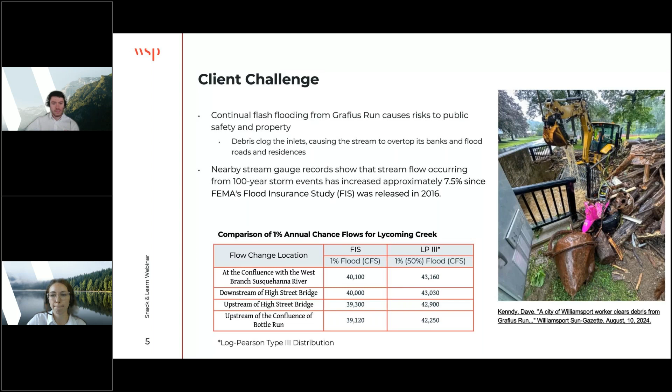So now we're going to go into a little bit more detail about the site and some of the project constraints. So Grafius Run is a flashy stream, meaning that flooding occurs very quickly without much warning. This is due to the steep topography of the watersheds. And as briefly mentioned before, Grafius Run is a forked stream with two branches, which we'll refer to as the East Branch and the West Branch. Each branch has contributing drainage areas of approximately 1.5 square miles, and both branches of Grafius Run discharge to the city's storm sewer system at this location, where the water then flows under the city to the Hepburn Street pump station, at which point the water is pumped through the levee to the West Branch Susquehanna River.

So to get into some of the project constraints that we've encountered, first, the capacity of the storm sewer system can't be upgraded to handle larger flows for a few different reasons. First, one of the biggest contributors to flooding is due to the debris clogs, which would still occur if the capacity of the system was increased, simply just due to the extent of debris that accumulate there.

And then second, since flows from Grafius are discharged through a pump station, the pump station would need to be upgraded as well to accommodate this increase in flow, which would be very expensive, and the city doesn't have the funds to undertake a project of that size at this time. And then finally, upgrading the storm sewer system may have impacts to historic resources related to the Underground Railroad, which we'll discuss a little bit more on the next slide.

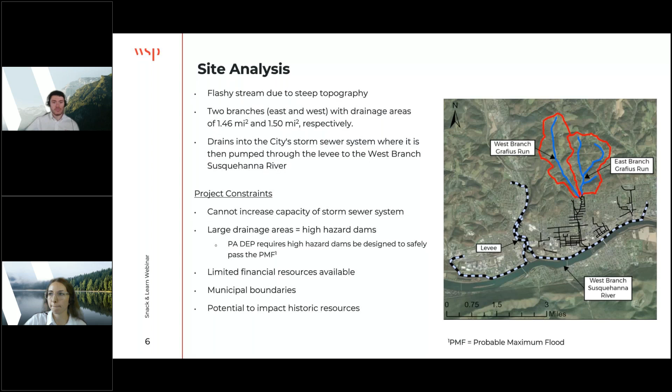And then finally, there's a potential to impact historic resources related to the Underground Railroad, not just within the city's storm sewer system, but within the Grafius Run watershed as a whole. And we're going to get into that on the next slide. So, as mentioned, there are historic sites related to the Underground Railroad that can be found within the Grafius Run watersheds. And the Underground Railroad is an important part of American history.

And in addition to the anecdotal reports of the sewers and caves' relation to the Underground Railroad, land donated by Daniel Hughes, who provided significant support to the Underground Railroad in Williamsport, is now the location of the Freedom Road Cemetery, which contains the grave sites for 9 African American Civil War veterans. So overall, we had to consider any potential impacts that our proposed project would have on these historic sites.

So now that we've provided some background and discussed the project constraints, we'll discuss in a little bit more detail some of the alternatives that were initially considered to help mitigate flooding along Grafius Run. The city contracted with WSP initially to design conceptual designs for detention basins along both the east and west branches of Grafius Run, and the intent was to hold the water within impoundments so that we could limit any flash flooding downstream. For the conceptual designs, we initially assumed that no excavation would be required for the basins, and the extent of the proposed impoundments was just based on the natural topography.

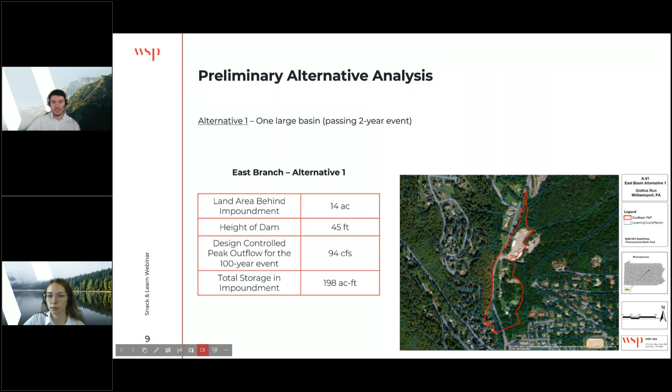So for alternative 2, this includes construction of 3 stepped basins, and these are just smaller impoundments that are along the length of the stream. We initially included this alternative in our analysis to see if there was a way to reduce the size of the impoundments, but this alternative actually requires the most amount of land, which totals to about 29 acres for all 3 impoundments. And then the dam heights would range between 20 and 40 feet.

This alternative was also the most challenging to keep within city limits due to how far upstream the impoundments extend. And just like the last slide, the red lines in this figure show the extent of the 3 impoundments that would be required.

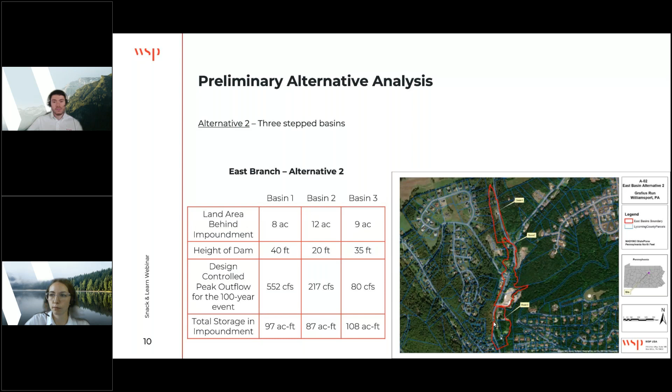So for the last preliminary alternative we'll talk about, alternative 3 includes one storage basin with pumped outflow. And like alternative 1, this dam will also pass flows that are equivalent to the 2-year event, but instead of containing all of the additional floodwater within the impoundment, almost 500 cubic feet per second would be pumped out to a receiving stream.

And while this alternative would require the smallest amount of land acquisition, the pumps that would be needed would be very expensive, and pumping the water to a receiving stream would also require coordination with FEMA to pursue a letter of map revision, which would add additional costs and delay the schedule of the project. And this alternative would also still require a 20-foot high dam and the relocation of residents living along the stream.

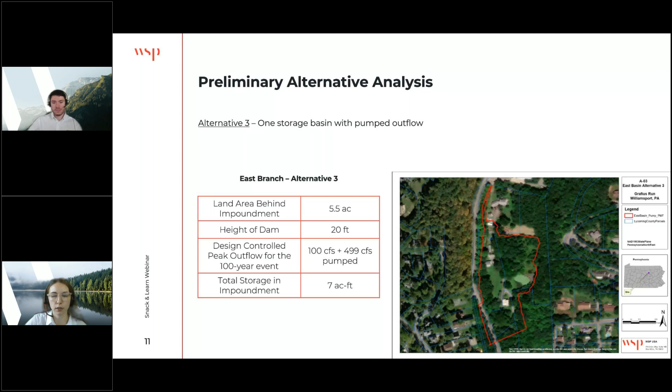So now we'll discuss some of the major drawbacks associated with the preliminary alternatives. Due to the large size of these impoundments, this project would be very expensive, and the cost just for land acquisition would be over $1 million, which exceeds the city's budget. All of the alternatives would require permits from the United States Army Corps of Engineers, the Pennsylvania Department of Environmental Protection, Lycoming County, and Alternative 3 would also require coordination with FEMA.

Since flooding from Grafius is frequent, the city ideally wanted to identify a solution that could be implemented within a reasonable time frame. And with all of these permits needed, it would have taken years for one of these alternatives to be constructed. And in addition to the high costs and permitting requirements, these dams would be considered high hazard, not just for the size of the drainage areas, but also due to them being directly upstream of the city. Any breach of these dams would result in an immediate risk of life and property.

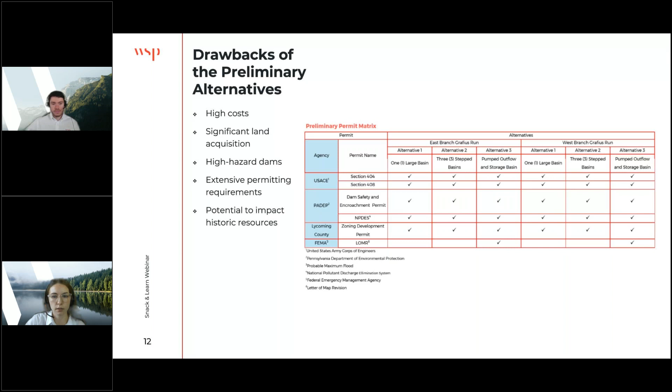And then finally, the potential to impact historic resources would add additional permitting requirements, and this would further increase the cost and delay the schedule of the project. So with all that being said, we ultimately decided that the preliminary alternatives that were analyzed would not be feasible. So after discussions with the city, WSP proposed a new innovative solution that is not what the city initially intended, but it would help mitigate flooding at a reasonable cost and would be able to be implemented quickly and efficiently.

The sensors use pressure from water above to determine how high the water level is. Once a preset level is reached, an alert is sent out to the city. This lets on-call maintenance members know to go out to where areas of the stream are backlogged and clear out the debris as shown in the previous slide.

The water height is set to a level that gives the on-call team at least a 30-minute heads up before water will reach the top of the bank. This is important because before sensors were installed, team members had to trek through some of the water, which is a safety concern and also makes it more difficult to clear out the debris.

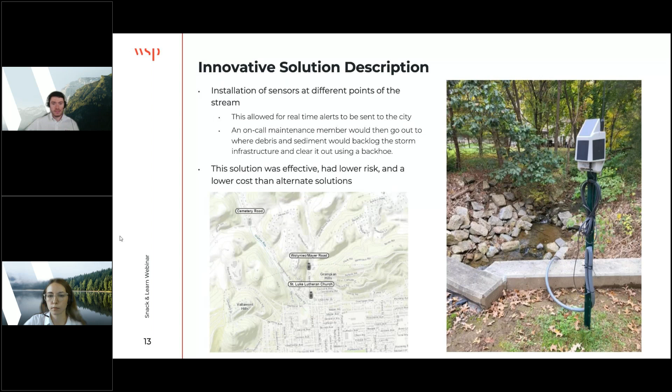Three sensors were placed along the stream, two upstream and one closer to where the water enters the water system. Sensors had to be somewhere that was easily accessible, had low vegetation, cellular reception to be able to send the alerts, and sunlight since they are powered by solar panels.

Water depths and alerts from past storms can be viewed online by WSP and the city, so data can be used for any other preventative measures. Sensors were proposed in spring of 2023 and installed in fall of 2023, with the delay caused by the backorder of the sensors.

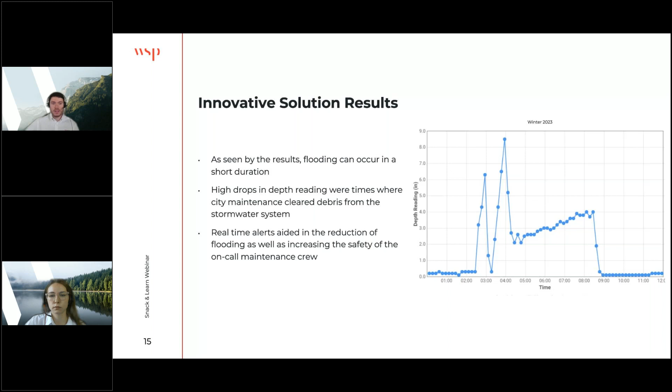This was able to be done before water flooded over the banks, making it more efficient and safer for the staff. This same trend, where quick rises and drops in water level, are shown in many storms as we look at data after major precipitation events. This backs up the effectiveness of using the sensors.

A continuation of this project was to build a HEC-HMS model to help inform the city if any future flood control designs are needed. The model will be calibrated every year for 3 years based on any new data collected from the sensors and rain gauges. The sensors will still be a viable method as precipitation patterns change and increase. They will also work no matter how frequent storm events are and will always send an alert to the on-call staff as long as they are working properly.

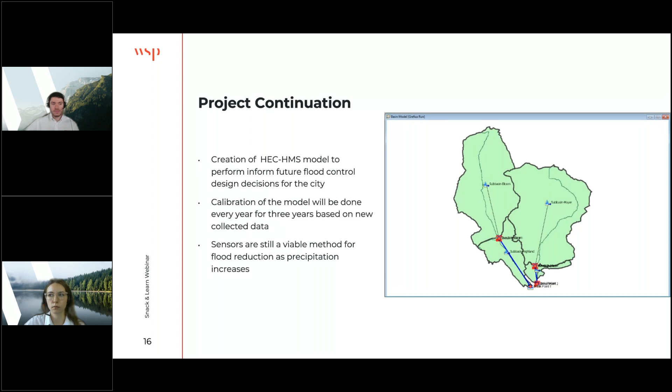Some key takeaways for this project are that a common approach to flooding issues is to build a structure. However, based on the specific details of the site, as well as important constraints for the client, as explained through the presentation, a lower cost and quick implementation but still effective method, like the sensors, was the best fit for the client. This is supported by the feedback from the client as well as data from the storm events. This drives the point that as consultants, it's important to take consideration of all the parameters and do what's best to help the client with the issue they approach us with.